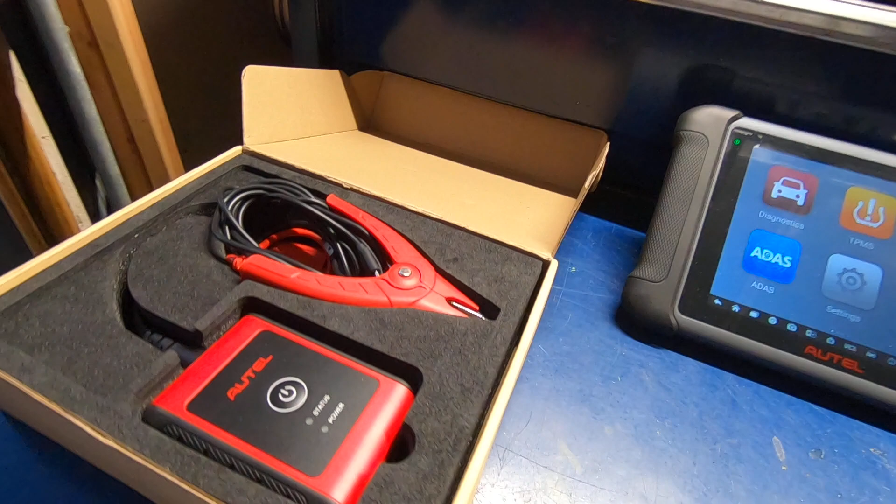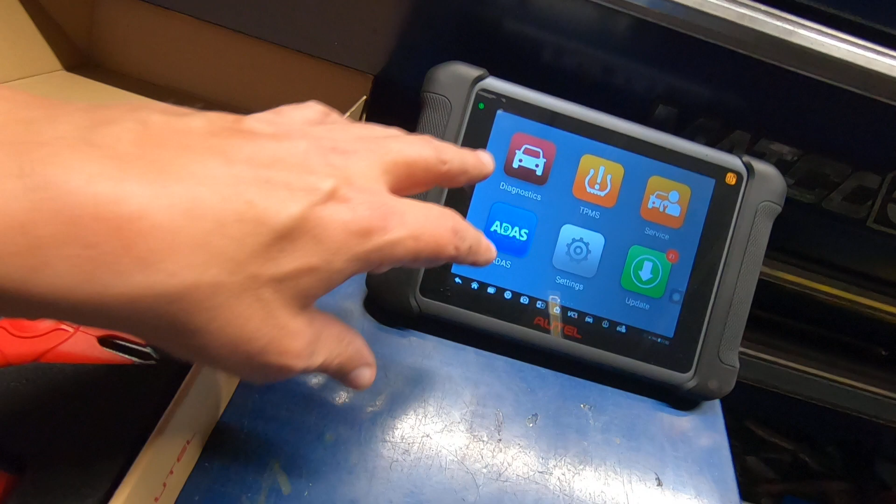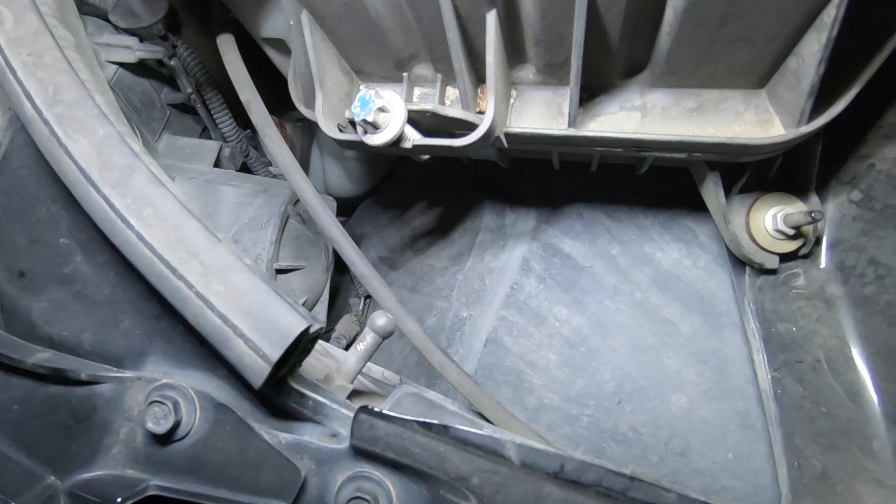We're going to do a battery and alternator test using the Autel BT506 battery tester and my MS906. And we're going to test the battery and the alternator on this Camaro. What I want to do is see if doing the test out here under the hood, by hooking it here to the jump terminal where you jump start the car. That's what this is right here.

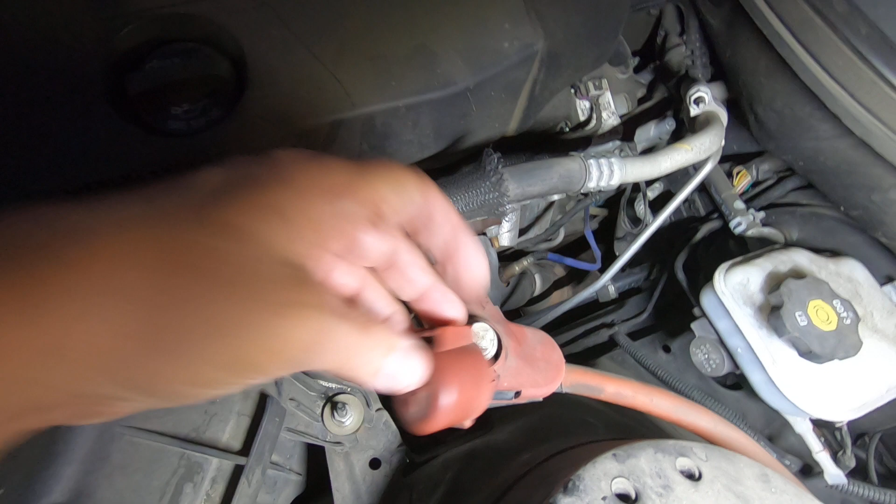I've already removed the cap, and then the negative body point where you'd hook the negative jumper cable up, versus hooking it directly to the battery, which is in the trunk on this vehicle. So this vehicle has a heavy battery cable right here that runs all the way to the trunk, and I've already got access to the battery.

This is an 800 cold cranking amp battery. Like I said, it's about 4 years old, and we're going to do the test here at the battery, and then we're going to do the test up front to see if you can get accurate results without having to remove everything.

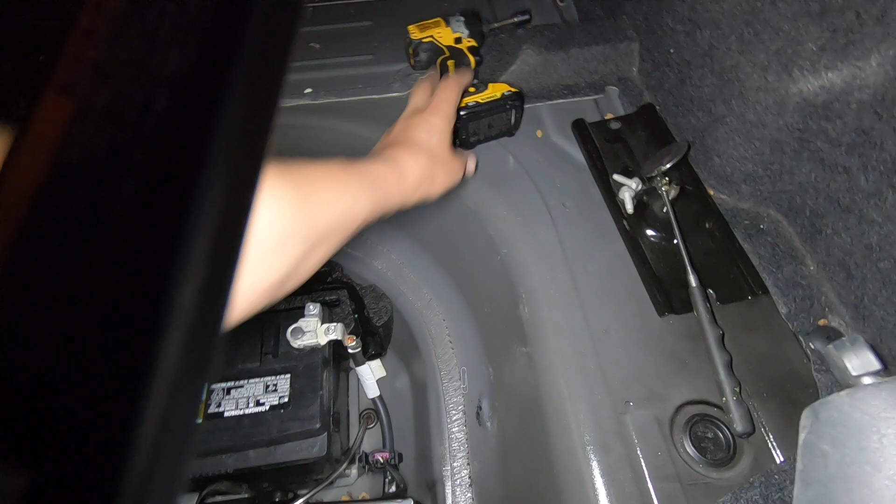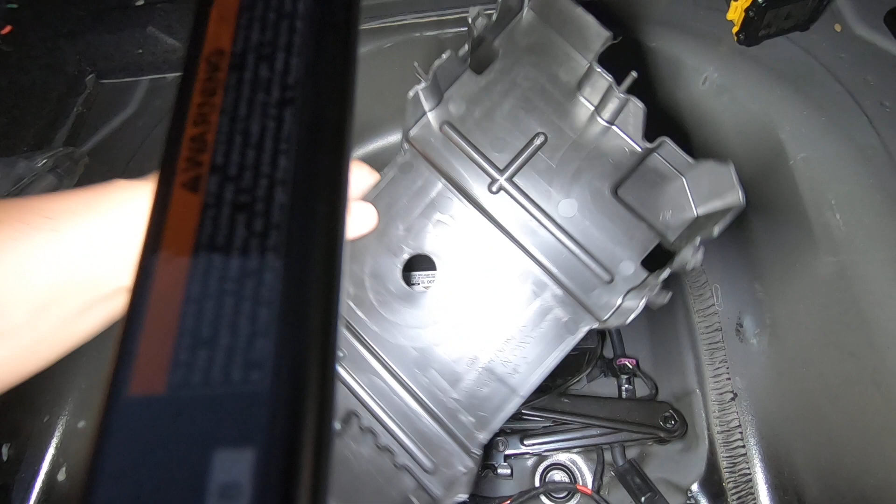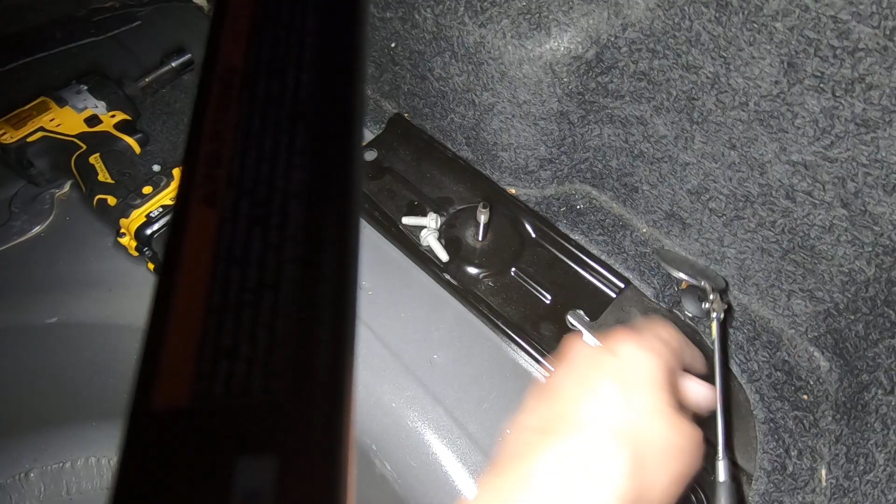Now, if you don't know how to access this battery, you've got to take everything out of the trunk. Here's the carpet. Here's the fiber board that you've got to pull out. You've got to pull your spare tire out. You've got to pull this plastic protective cover off. It just snaps off with those little clips. There's 4 of them. And then you've got to take a 13 millimeter, and there's this plate that is bolted on right there. So it takes a little bit of time to do a test of the battery to see if the battery's good.

The question is, will this tester give the same results regardless if we're here at the battery or up under the hood, where all you would have to do is pop the hood, hook the tester up, and do your check? So we're going to see what kind of difference there is, if there is a difference. So the next step is to get the tester here. And we're going to do it at the battery first.

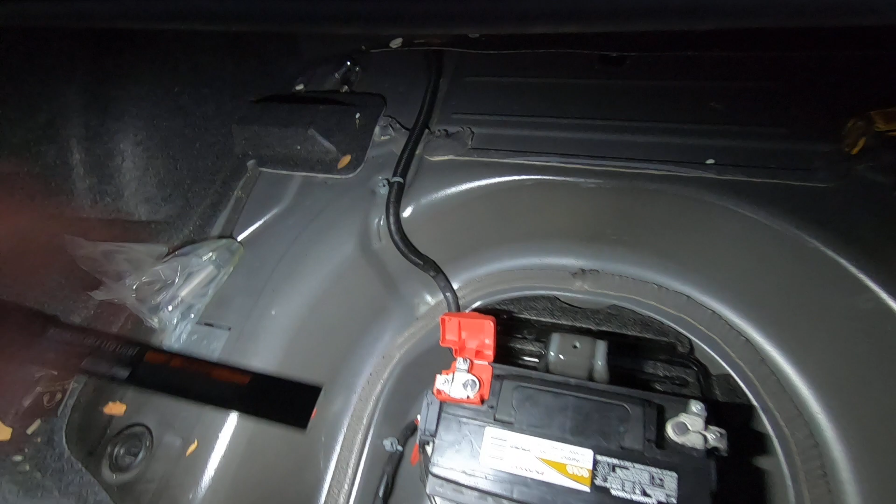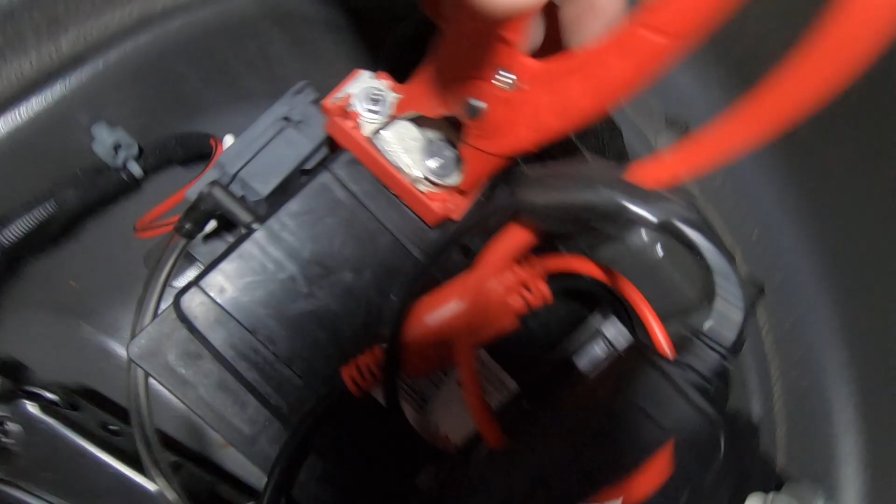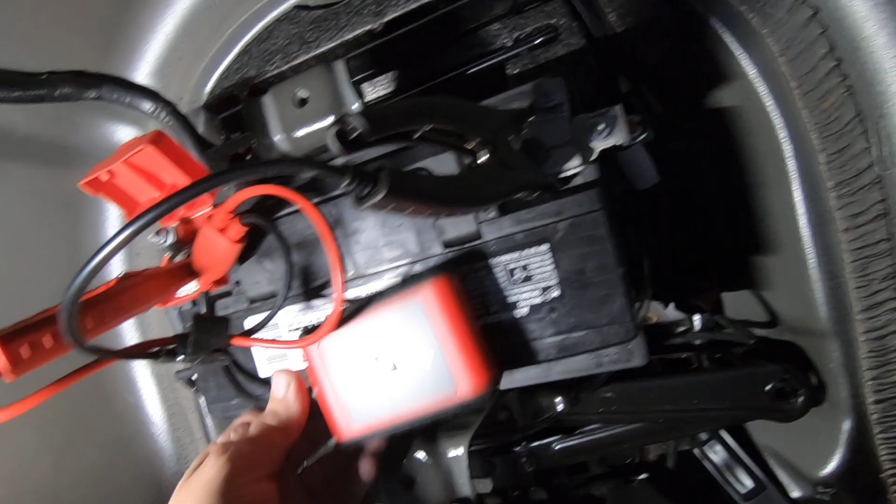Now, like I said when I reviewed this tester, I love these battery clips. They are just super nice to clamp on to whatever you need. They're skinny at the tips. Of course, this is reverse polarity protected, so if you hook it up backwards, you're not going to damage anything. Okay, so now we're hooked up here at the battery.

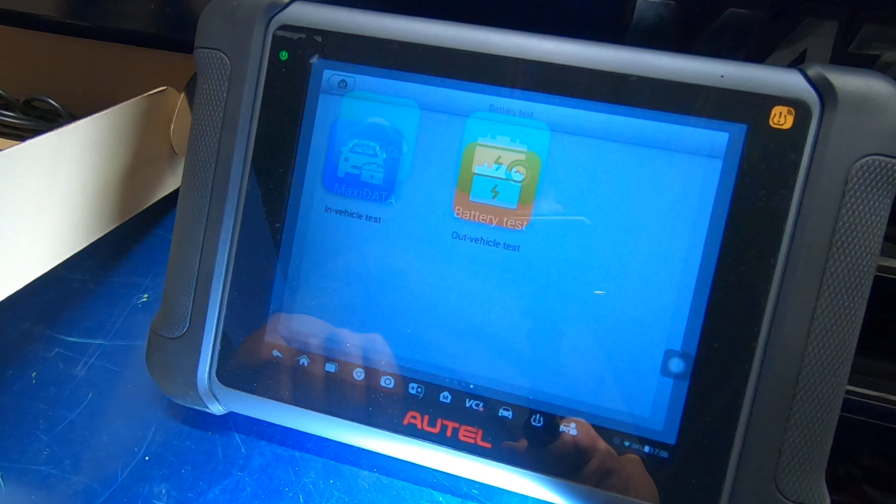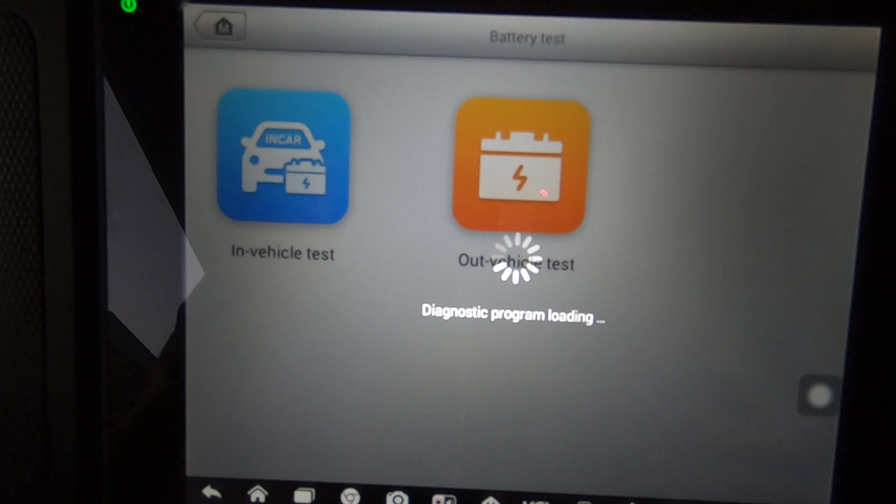We're just going to hit battery test. Let me get this light turned off so you guys can see. I'm going to hit in vehicle test. I'm not expecting this battery to be bad, but you just never know. I didn't even check to see if it's an AGM battery. Hold on. Okay, it is not an AGM battery. So we're going to go to flooded. We're going to do cold cranking amps. 800 is the rating. Then we're going to hit next.

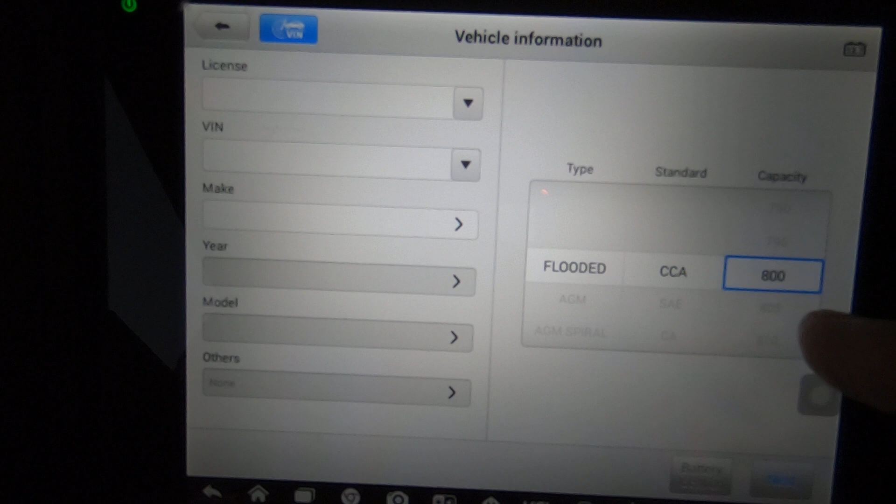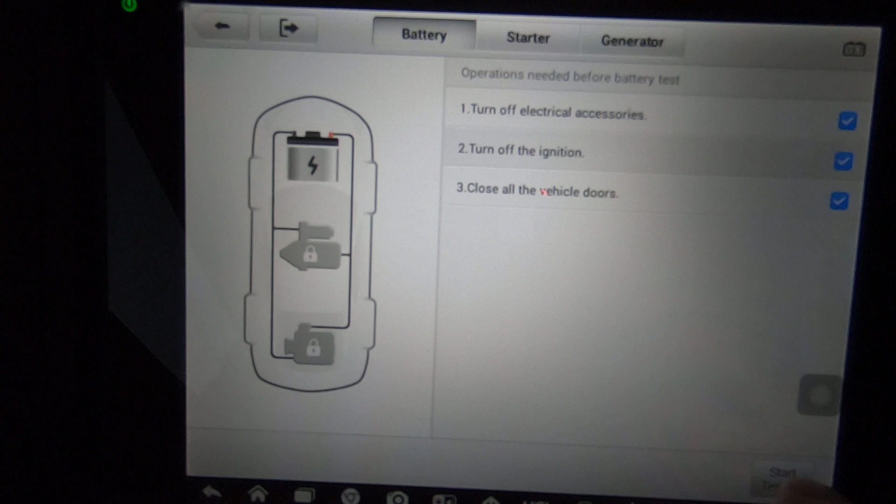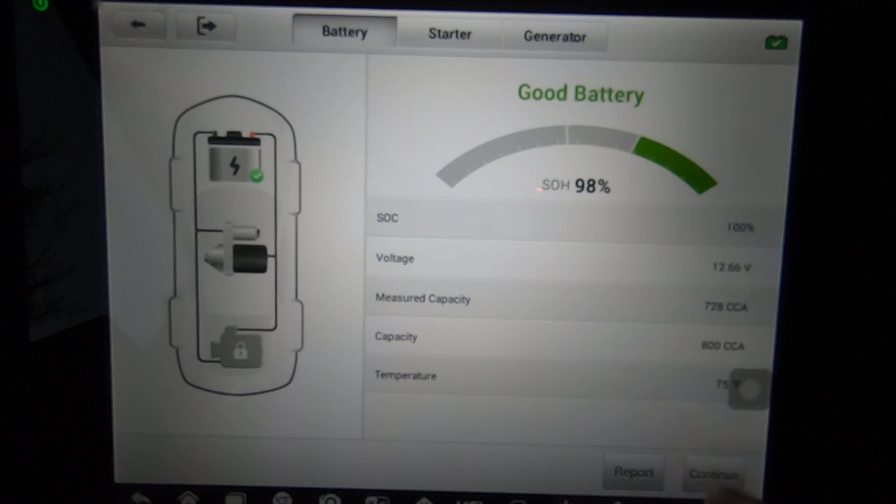Then we're going to check the 3 boxes you've got to check for it to activate the start test down here. We'll hit that and let it do its magic. Okay, state of health 98%, state of charge 100%, voltage is 12.66, measured capacity 728 cold cranking amps, and it is about 75 degrees out. So I'm going to go through. We're going to do a starter and a generator test. So I'm going to hit continue.

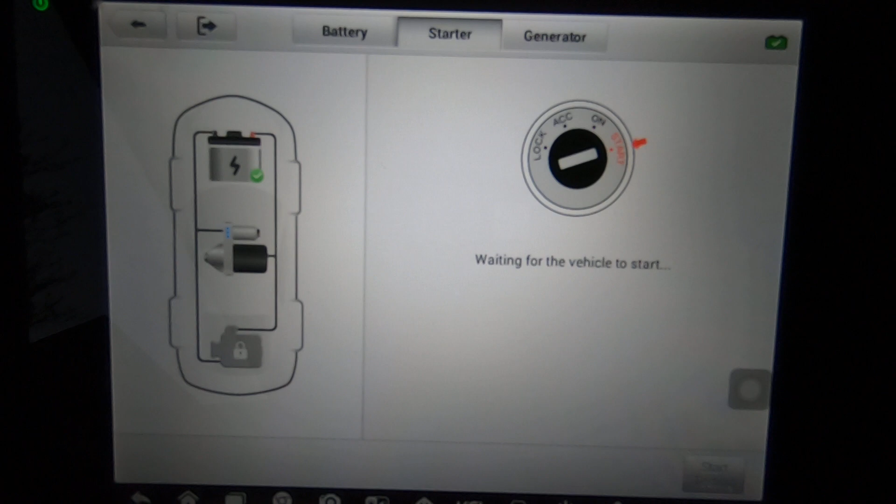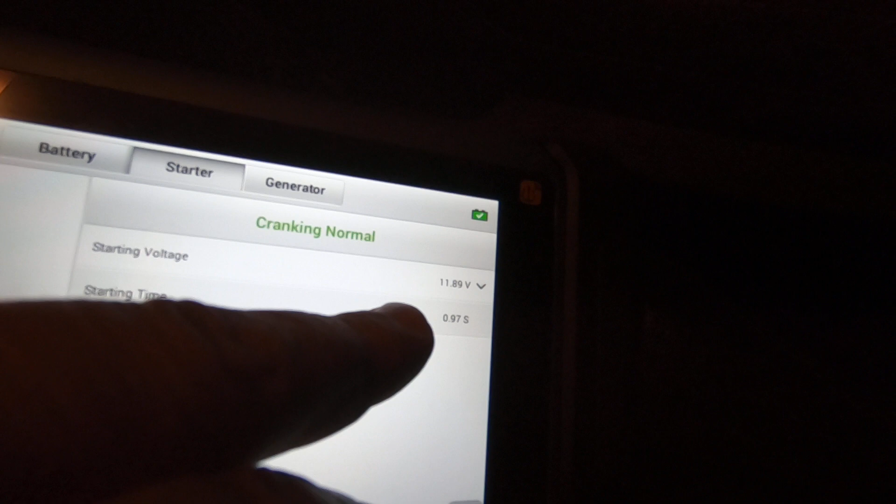Okay, we've got to check the box again. Ignition is off. Start testing. Waiting for vehicle to start. Let me start the vehicle. Okay, so cranking's normal. We had a voltage drop down to 11.89 and a starting time of 0.97 seconds.

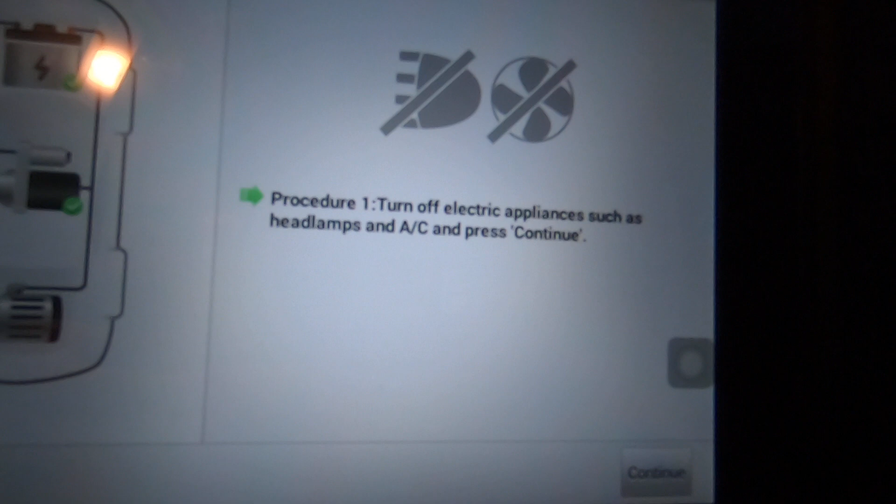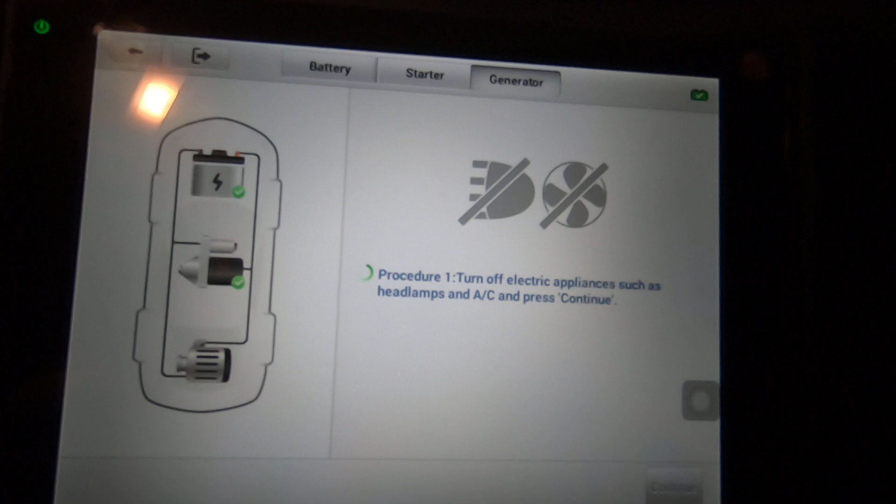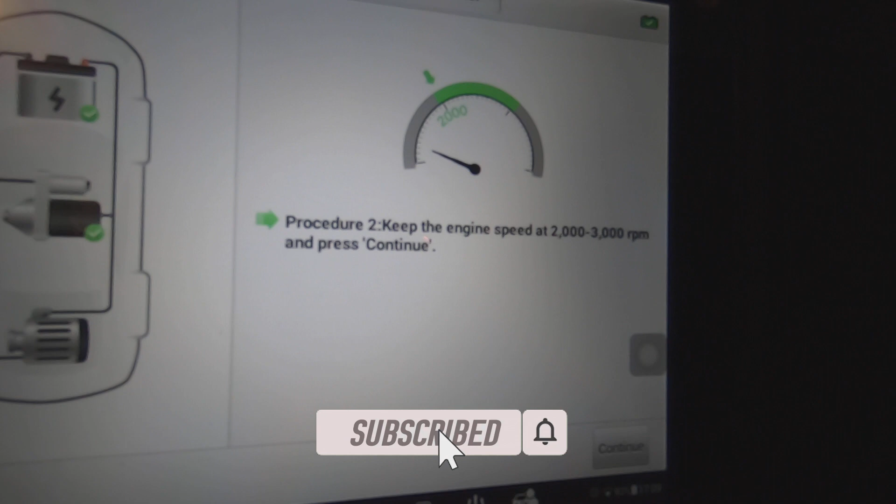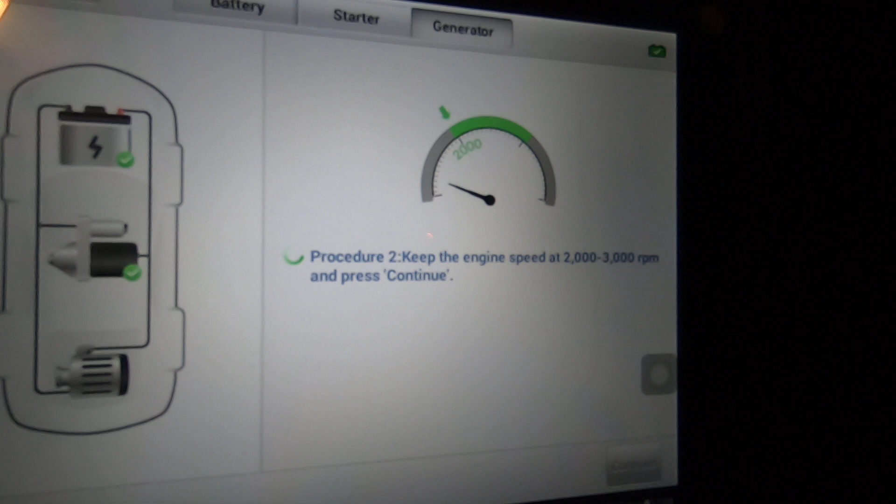We're going to hit continue. We'll turn everything off. Okay, everything is off. It says here turn off electrical appliances such as headlamps and AC and press continue. We're going to hit continue. And I believe we're going to rev it up. Okay, we're at 2,000 RPM. Hit continue. Release the accelerator pedal, press continue.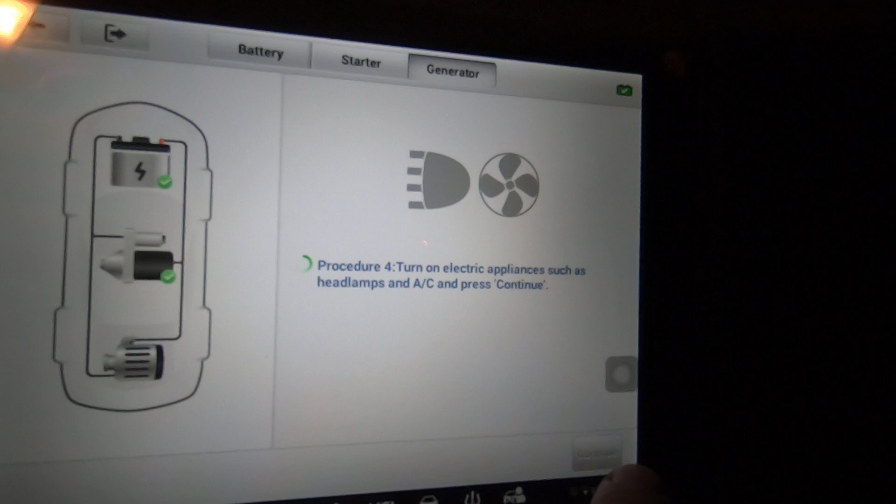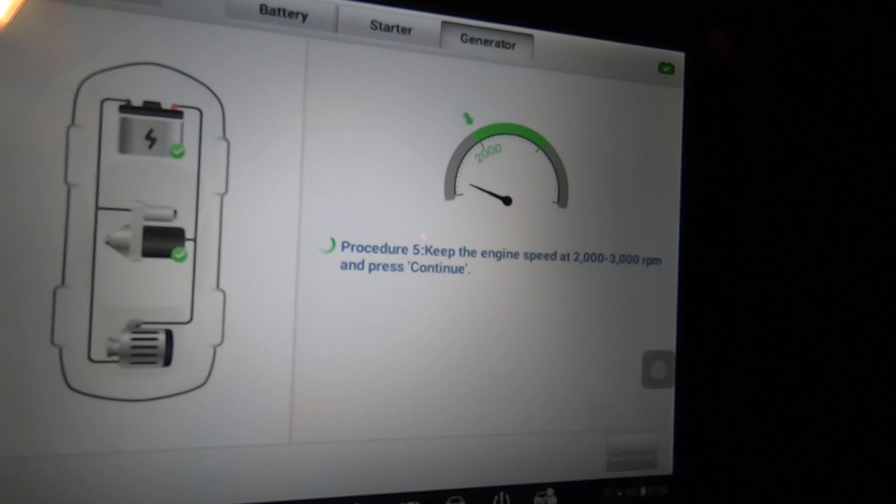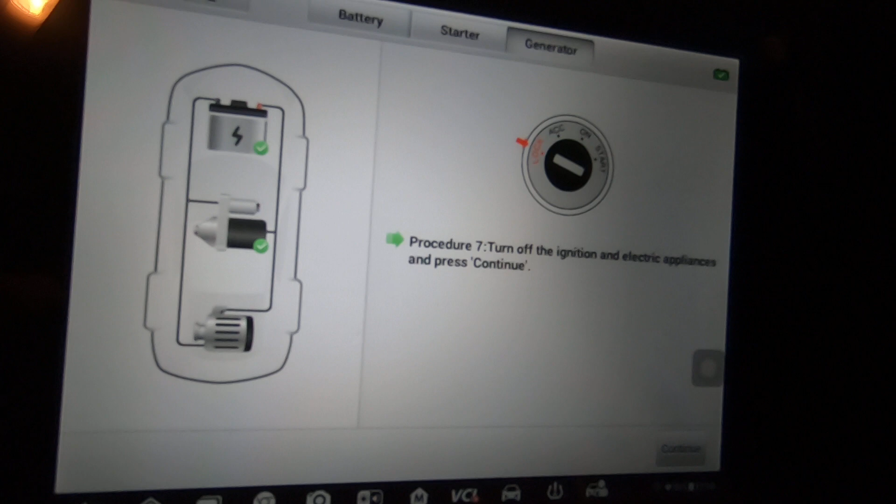Turn on some electrical load. So I'm going to turn the AC on. I'm going to turn the headlights on. Okay. I'm going to hit continue. There's 2,000. Turn off the ignition. And we have a 7 millivolt ripple.

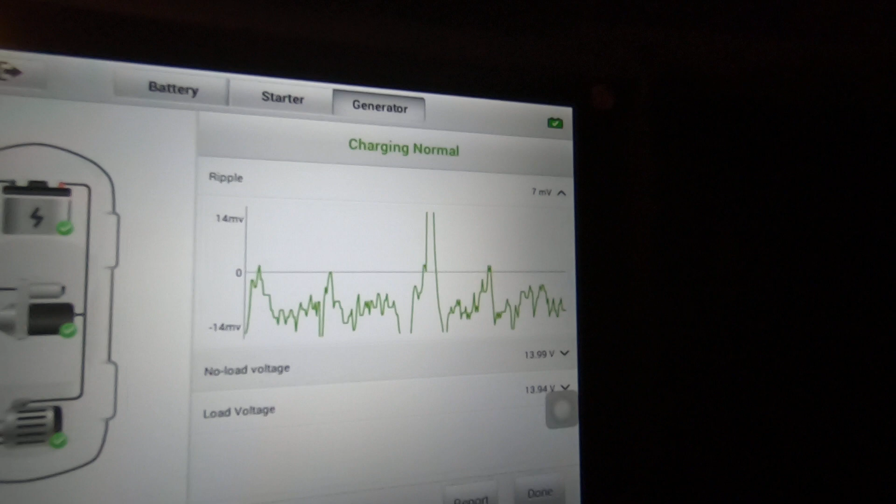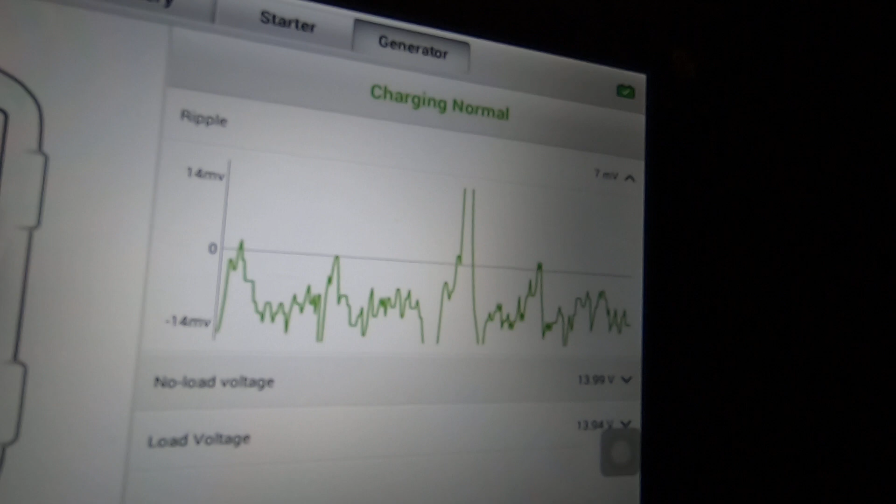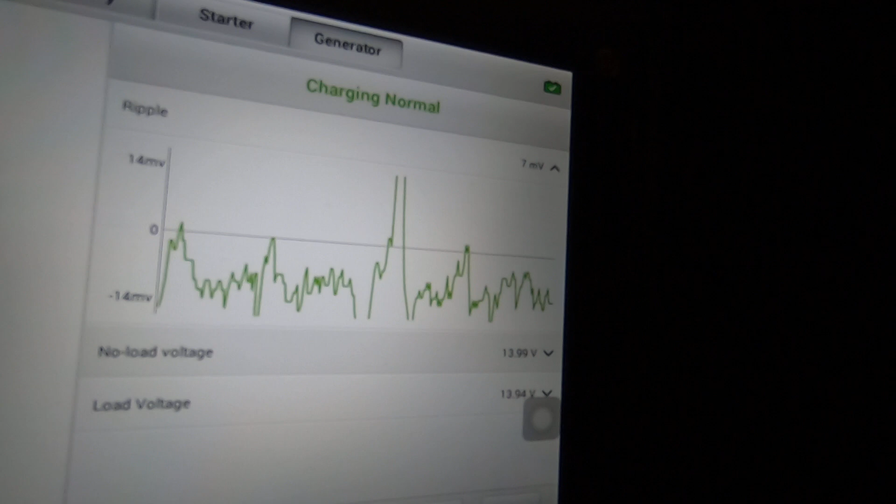And the nice thing about this, you can actually expand it out to show the graph, and you can see the ripple, which I think is kind of cool, to be able to physically see what kind of ripple it was getting. And 7 millivolts, plenty good, plenty within range. In fact, if you look up here in the green, charging normal, so it's happy with that. No load voltage was 13.99. The load voltage was 13.94. So both those are very good. So we're going to hit done.

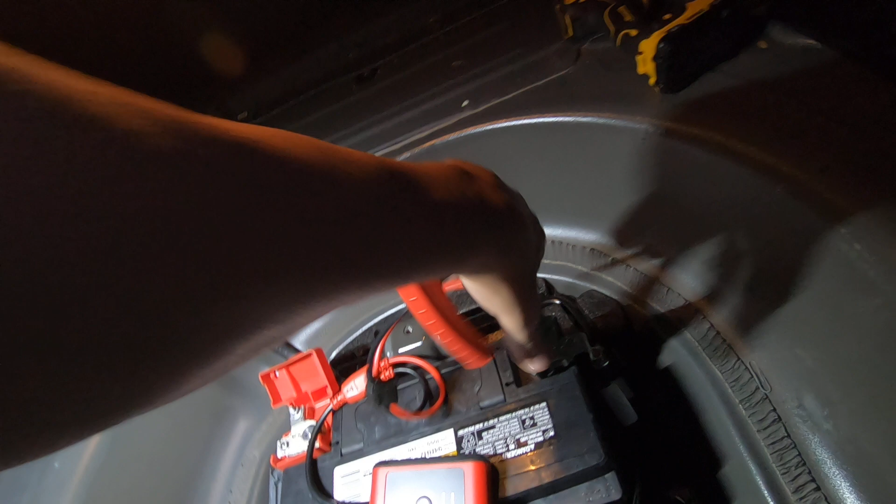And now you can also do a report if you wanted to, and it puts everything on one page of your results. So let me go ahead and get this tester hooked up under the hood, and let's see if it's going to make any difference at all.

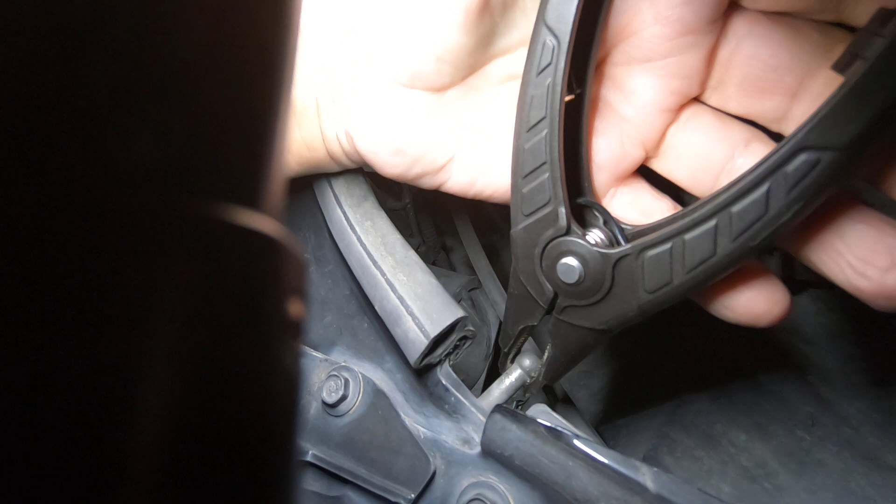All I'm going to do, I'm just going to hook the positive there. I'm going to come down here, hook the negative, twist it a little bit, make sure we got a good grip. Okay, everything looks good there. Back in the car.

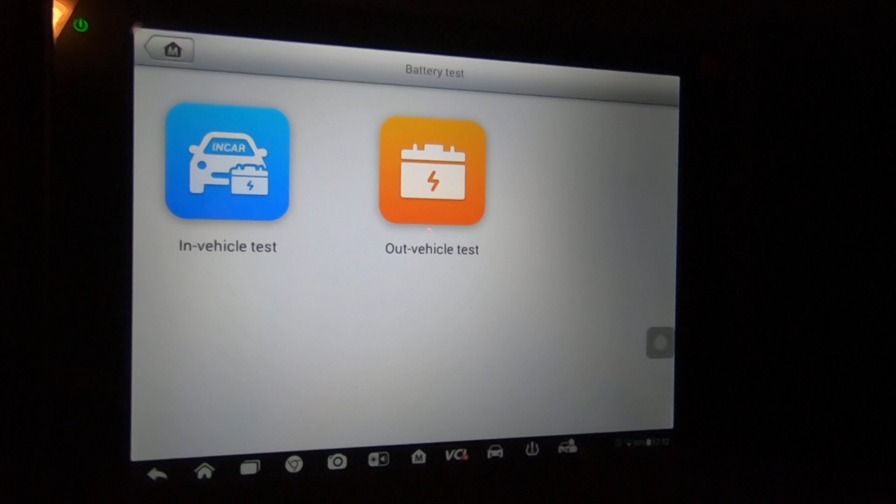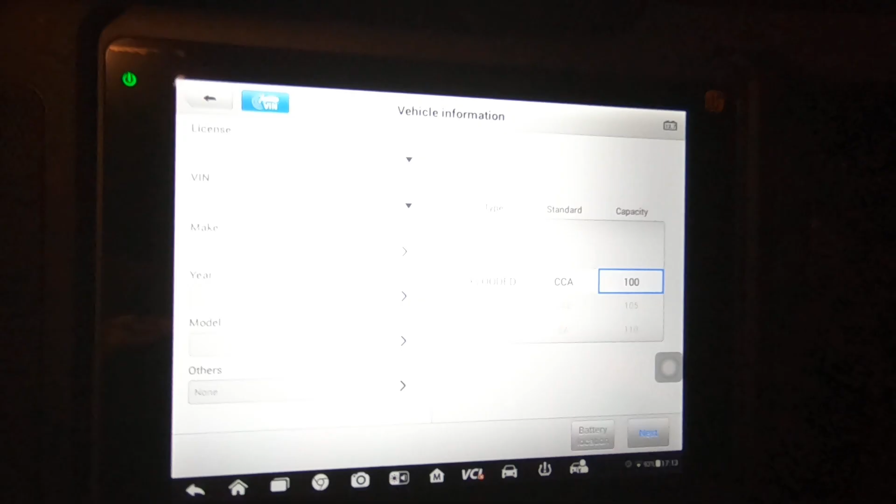And the main reason I'm doing this is just so I know for myself, if a car comes in and they say they're having battery or starter issues or alternator, can I do this test out there under the hood without having to access the battery and at least get hopefully pretty close results to the actual truth. So we're going to hit in-vehicle test. Of course, all that's going to be the same. We're going to hit OK. We're going to do our 3 boxes there. Hit start test.

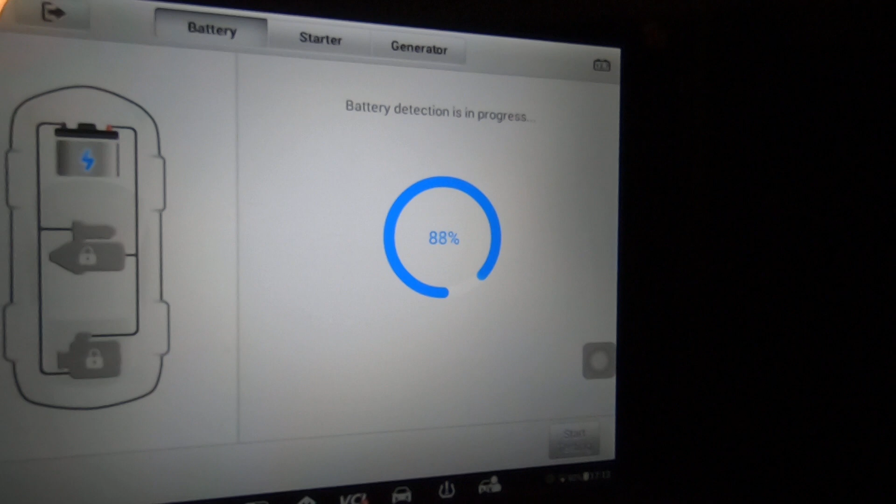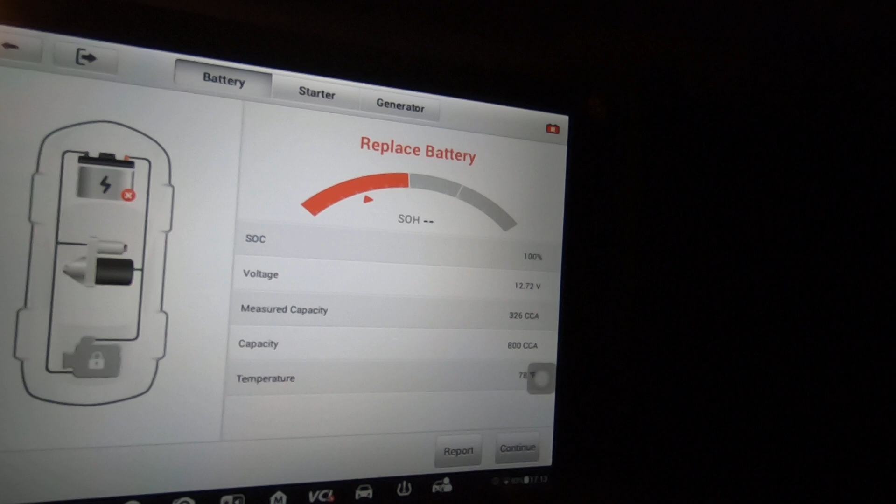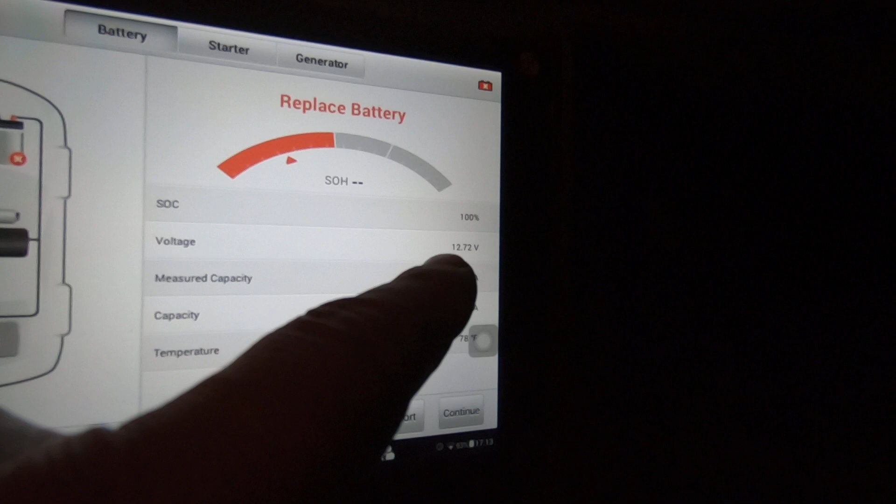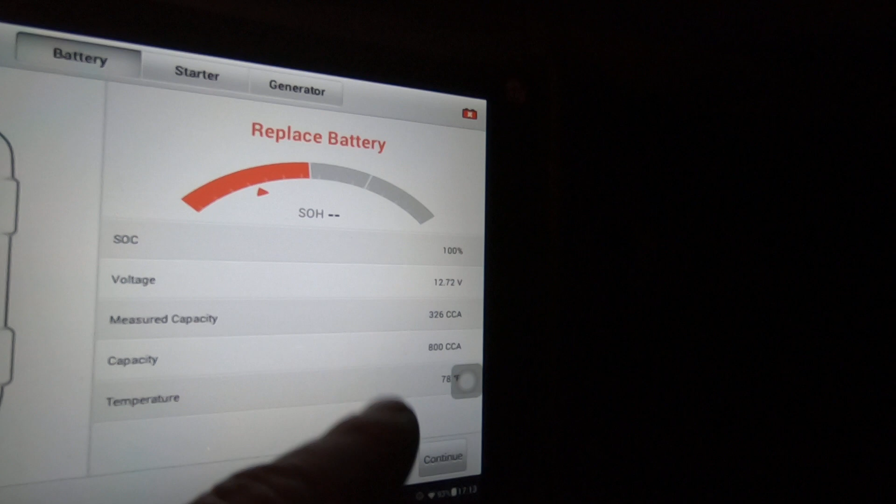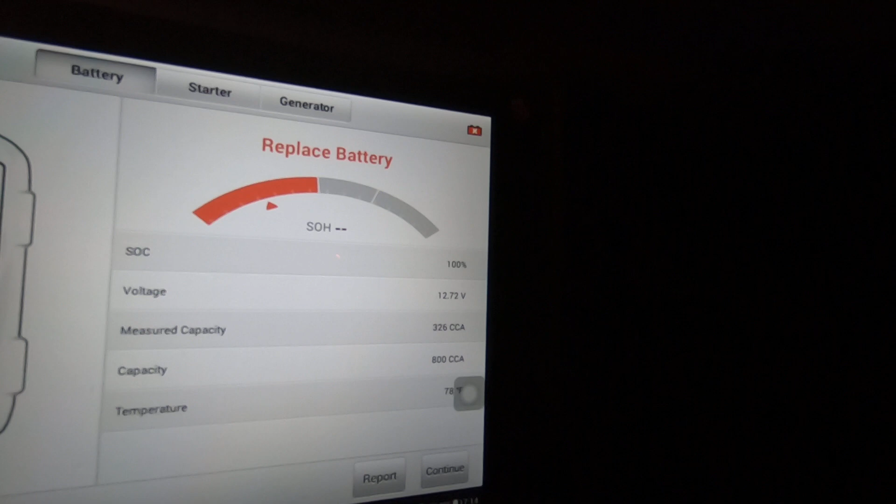12.72 volts is what the battery's showing, but it was only able to measure the capacity at 326 cold cranking amps. That's because of the length of run of wire going from under the hood to the battery, and then of course we're clamped to the body ground. So it's measuring probably a higher resistance than what it's happy with. So it's thinking the battery has higher internal resistance than what it does, more than likely. But let's go ahead and hit continue. Hit our check box. I'm going to hit start testing.

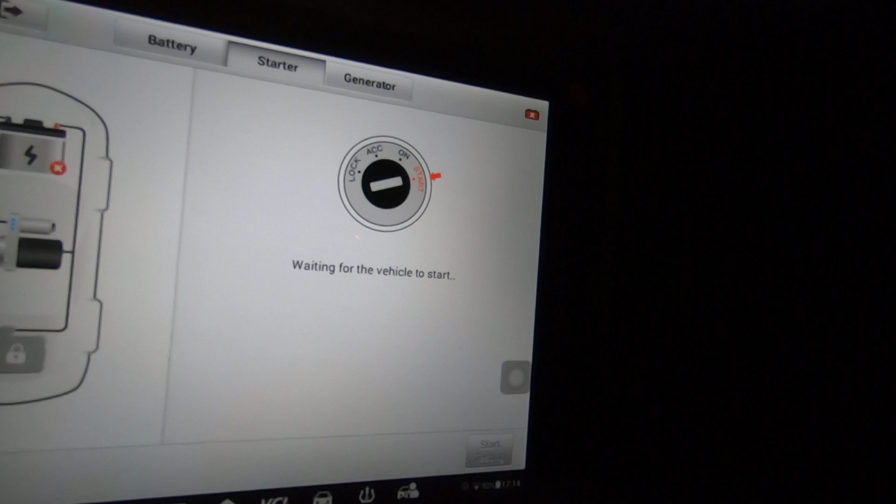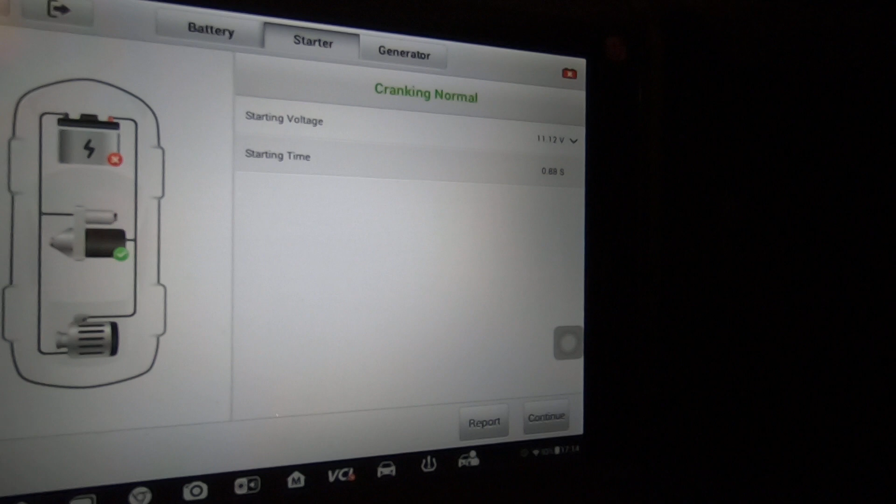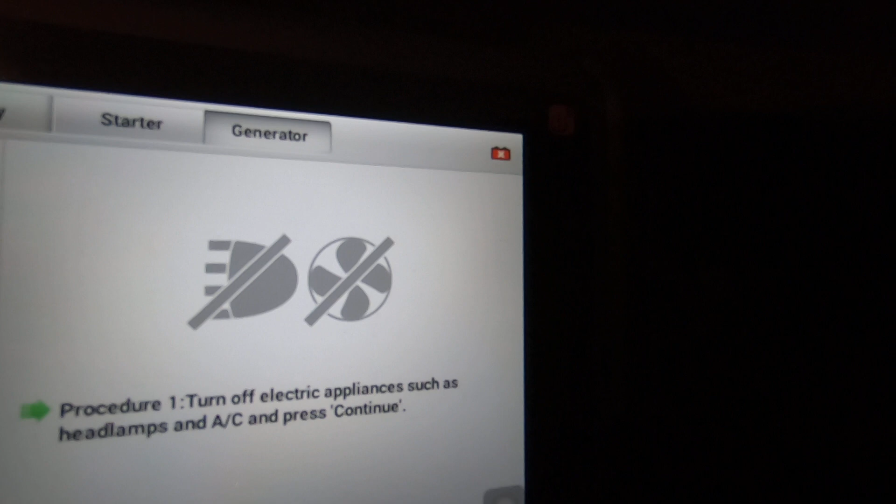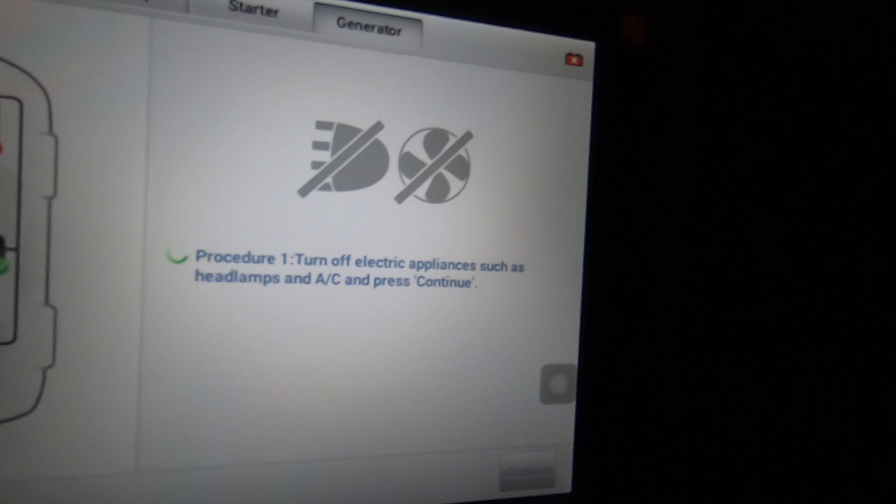Start the vehicle up. Okay, now the cranking was normal. Voltage drop only down to 11.12 with a start time of 0.88. So we're good there. Hit continue. Turn off electrical appliances. Okay, headlights are now off. AC is off. We're going to hit continue. Keep the speed at 2,000.

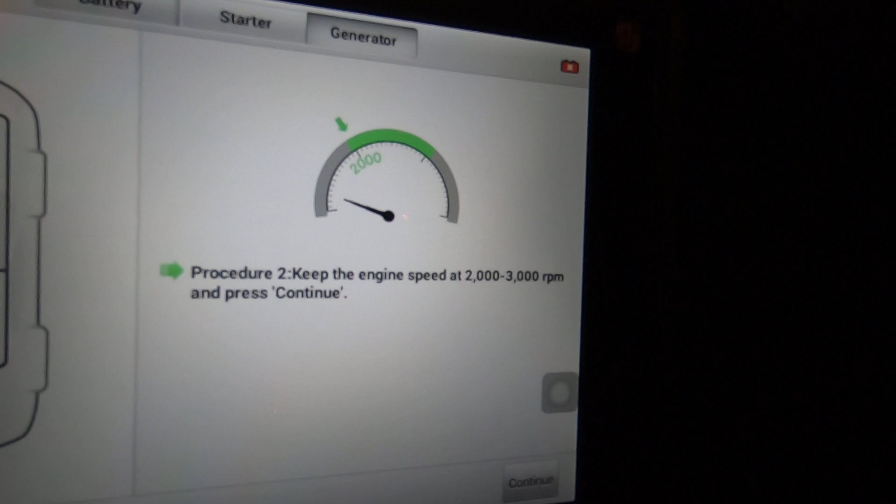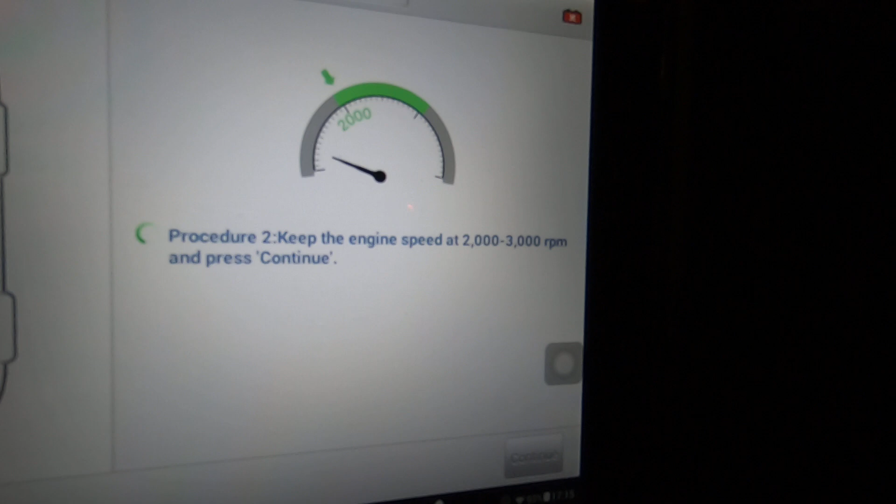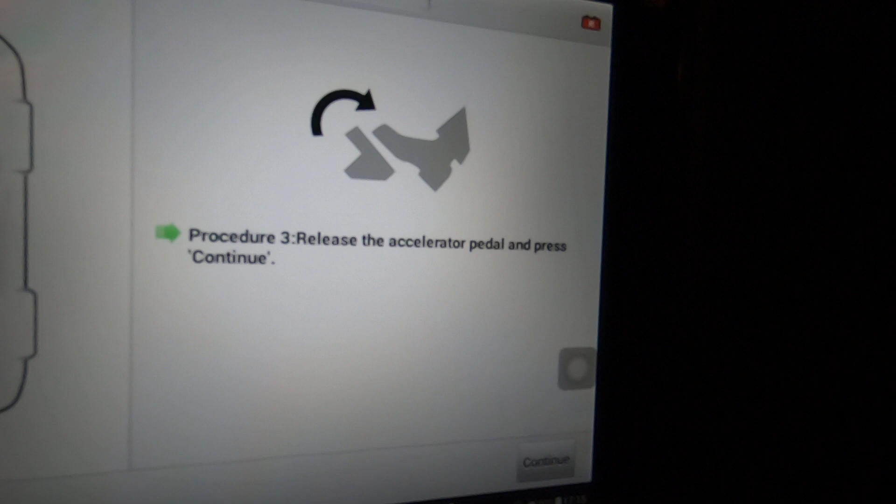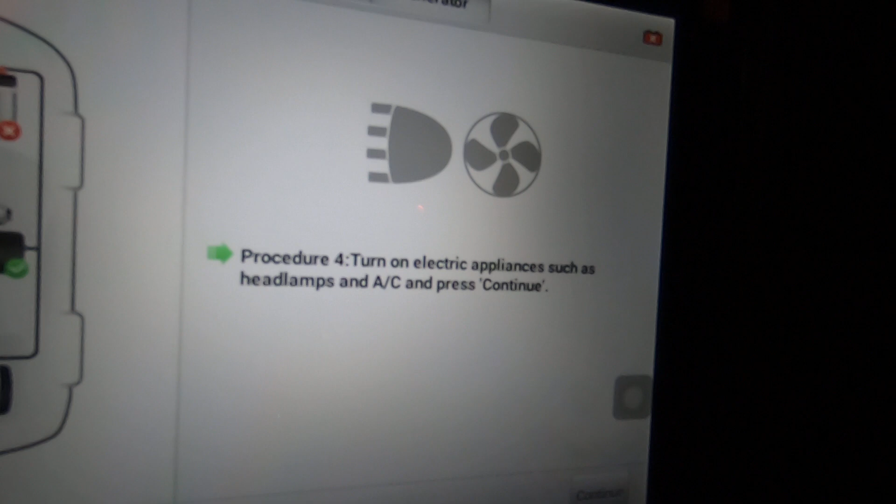Release. And I've noticed on some vehicles you can actually go by this little tach that they have on the screen, and it senses the alternator frequency. That is how it determines what the RPM is. If it can't sense the alternator frequency really good, then it has a hard time determining what the RPM is. So if you don't have a tach, hopefully the little tach up here will work for you. If not, you can probably just take a guess at it and probably be just fine.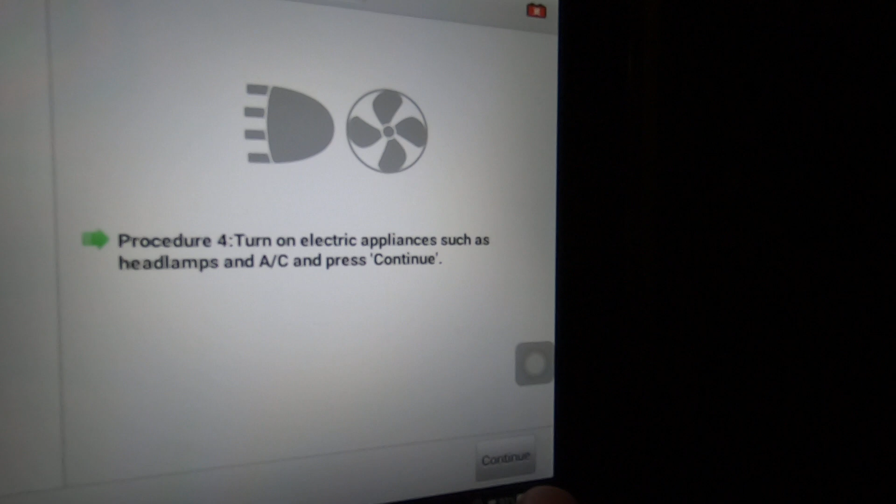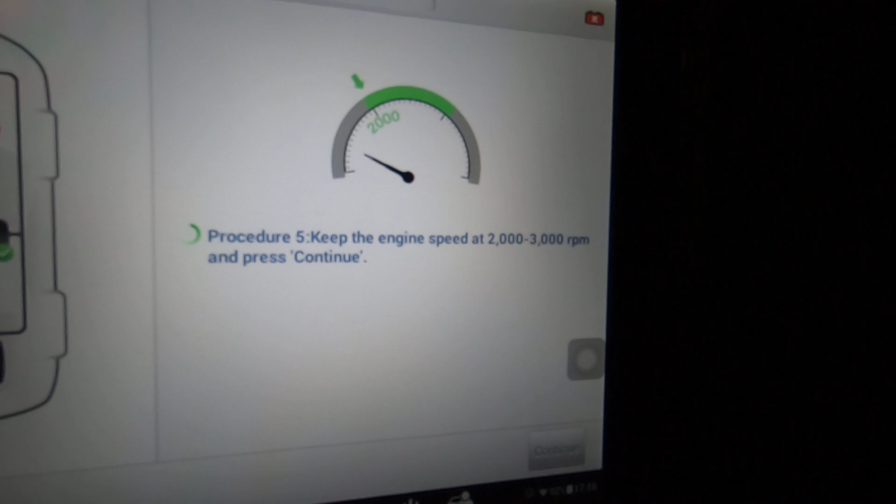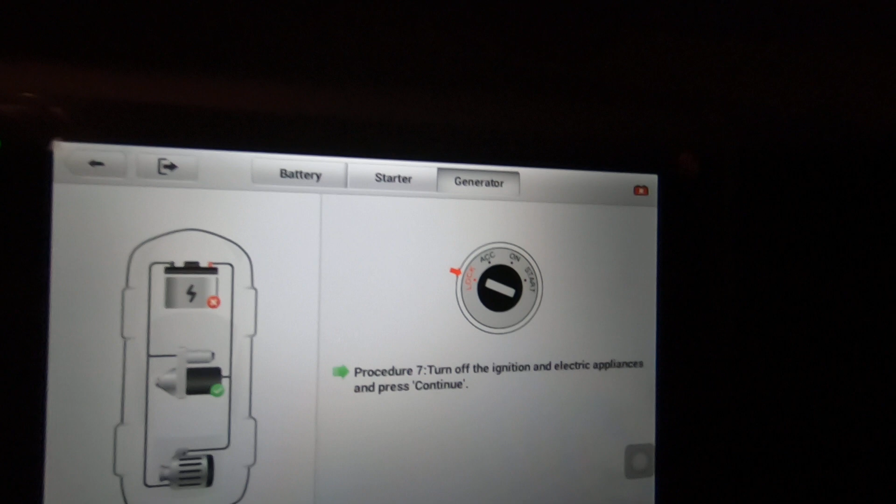Okay, so I've got the AC on, I got the headlights on. We're going to rev the engine about 2,000 RPM. We're going to hit continue. Okay, release, continue, turn ignition off. And it's happy with the charging.

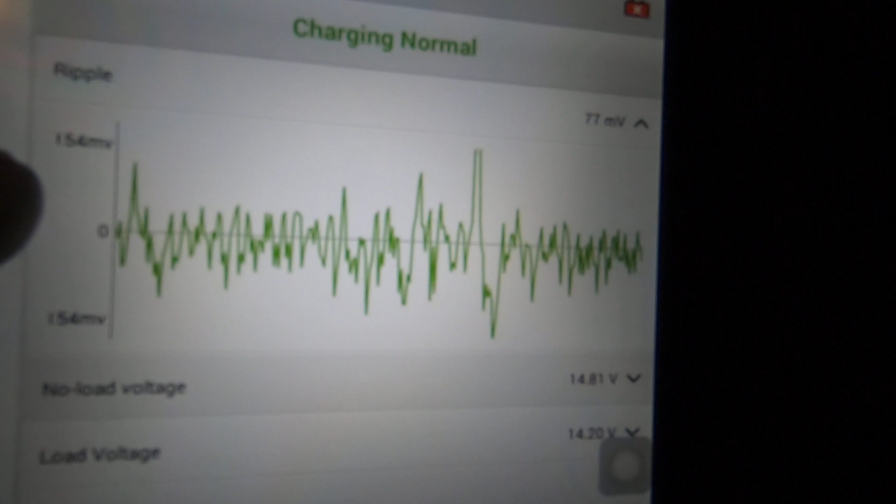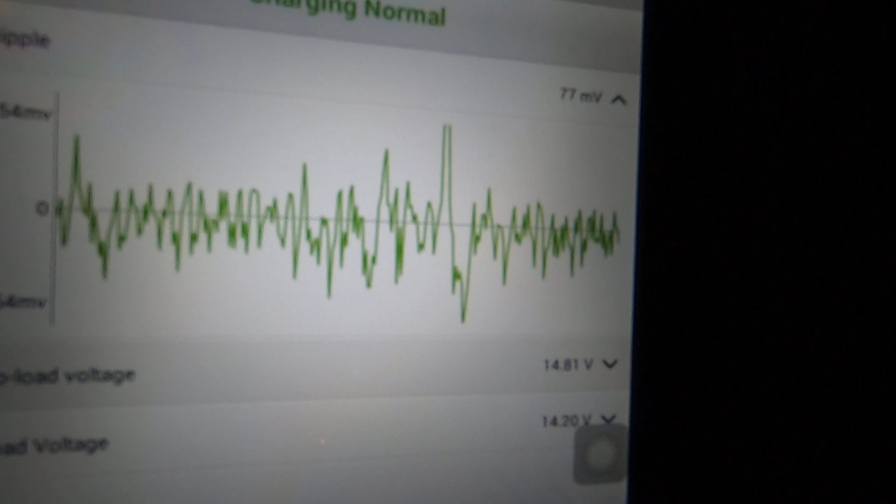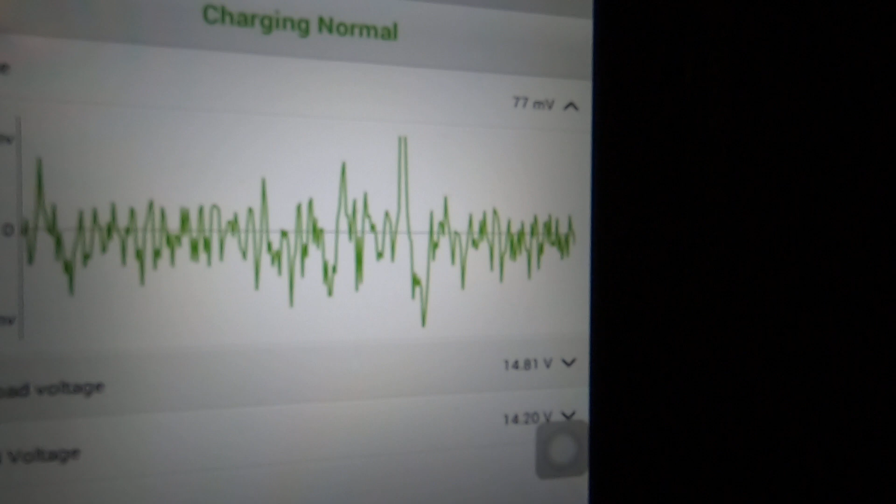Now notice the ripple. We got a lot higher ripple. In fact, we're up right here at this peak 154 millivolts. The average is 77 millivolts. When we was back at the actual battery, I think we was at 70 millivolts or 8 or something like that. We had a no load voltage of 14.81 and a loaded voltage of 14.2. So a lot more voltage drop when it was loaded up, because of that length of run of wire.

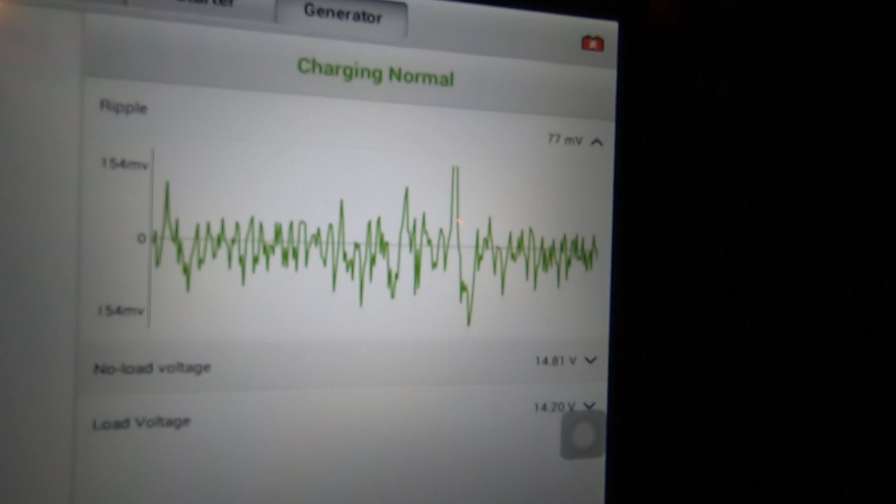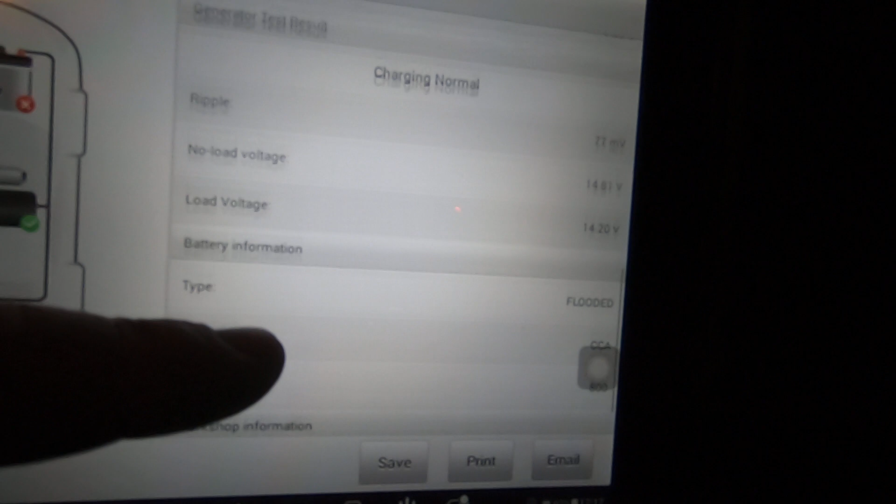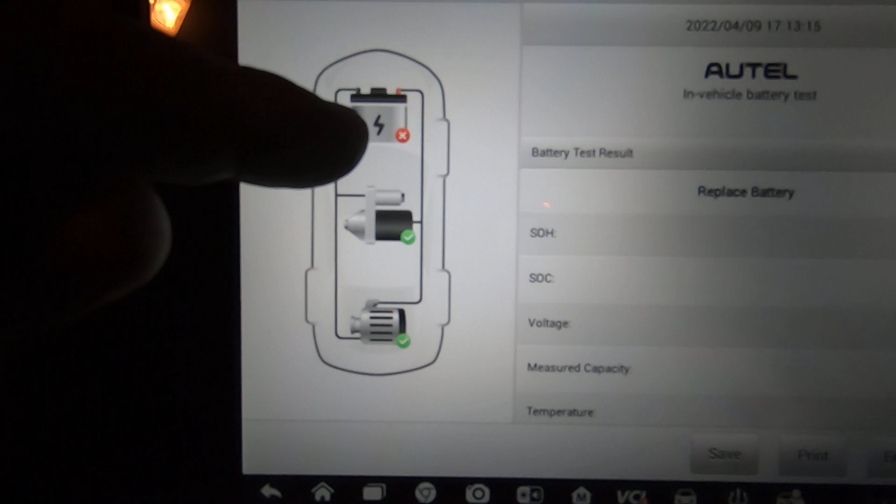And let me show you the report, just in case you're curious about that. If you hit report down here, it just kind of gives you a nice layout of all your testing results. If you wanted to print it off or save it, you can. Gives you a nice little diagram over here, battery, starter, and alternator symbols. Notice the red X for the battery, because it thinks the battery's no good. If you hit back right here, then you can get back out of that page. We're going to hit done. And yeah, there we have it.

So if you wanted to do an alternator or starter check, you could probably get away with doing it out under the hood, but the battery check itself really needs to be done at the battery itself. It does not like being done out here under the hood at the points where you jump start the vehicle. Now you could do it out here first just to see what it says, because if it shows that the battery is good and you're hooked up out here, it's definitely going to show that it's good if you're hooked up straight to the battery. So that would be another option. Do it out here first. If it shows good, you should be happy.

Now if it shows bad like it did for us just now, you may want to go ahead and pull everything out of the trunk, hook it to the battery, and see what it says then. And if it shows good, then you can probably assume the battery is good. If it shows bad, then probably be time to replace the battery. But anyway, I think that's about all I wanted to do. This was mainly just a curiosity deal to see if you could pull that off or not. Like I said, we have not had any issues with this battery, so I would not expect it to be bad.